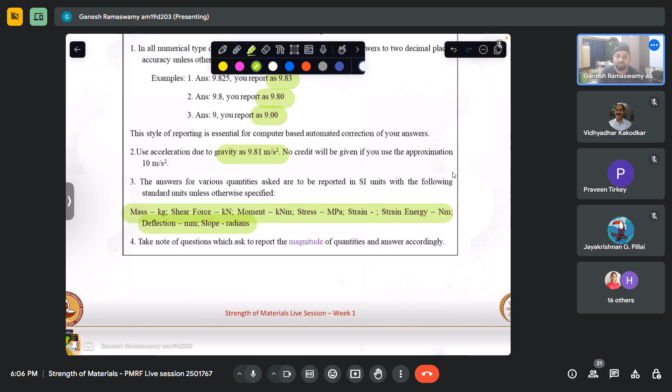For the various quantities that are asked, invariably it will be mentioned in the question what units you are expected to report in. However, I also urge you to be comfortable with unit conversions, because as a practicing engineer, when we come across different quantities, it will not always be in the units we want, and it cannot simply be multiplied. So we will require conversions, and it is important that we become conversant and comfortable with them.

Also, there would be questions where even though the answer is compressive or negative, perhaps it is a compressive stress, or a vector component which is negative, we have to look out for questions which ask for the magnitude. If the word magnitude is written, it is imperative that we report the absolute value in order to have that correctly. I hope we can abide by these simple rules so that we don't lose out on marks.

And I just want to... although, yes, please. Sorry, my name is Jayakrishnan. Yeah, hi, if I may ask, yes, so you mentioned about the two decimal places rounding.

So obviously when you have multiplication or similar operations, you can have the rounding errors add up. So would you advise that we deal with the whole set of decimals when we do multiplication etc., and just round off the final answer?

Actually, it will be preferable that you do that. But in any case, we have given enough leverage in the range to accommodate these deviations. Just in case it doesn't accumulate out of range, I'm mentioning it. There is no need for apprehension about whether we need to round off at each step or towards the end. We have given a comfortable range, and we are also in a position to make corrections if need be, although we don't anticipate that need would arise. For now, you can proceed with rounding off at steps so that we stay within the range.

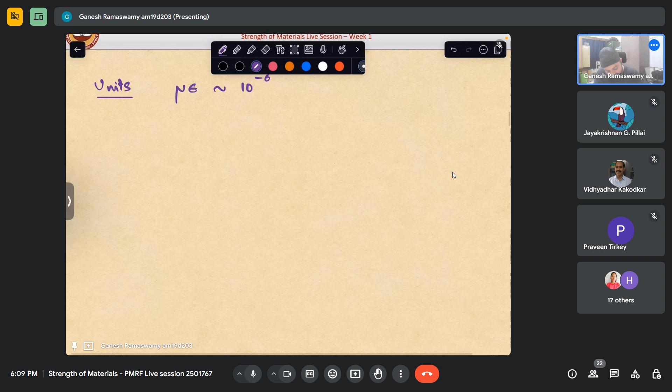The major issue comes when we deal with stresses and elastic constants. As we will see throughout this course, we'll have multiple elastic constants. Generally, let me take the Young's modulus as an example, and let me take it to be of steel. Steel's Young's modulus is around 200 GPa. The value is not important per se as of now, I'm just focusing on the units. So what does this GPa mean?

I've noticed that some people have a problem converting this towards the final answer. Even if they know the steps, there's a problem with unit conversion and they tend to lose out. I don't want that to happen, which is why I'm giving a basic brief about this. People might find it pedestrian and basic, but I request you bear with it so everybody is on the same page. So this is nothing but 10 power 9 Pascal. Now what is 1 Pascal? Pascal is nothing but 1 Newton per meter square — this is the unit. So when we substitute the value of Young's modulus in an equation, we have to ensure it is substituted in consistent units. Now, often we will come across a unit of stress.

The SI unit will be MPa. Now, what is MPa? It is nothing but 10 power 6 Pascal, which is 10 power 6 Newton per meter square, which is also equal to 1 Newton per mm squared.

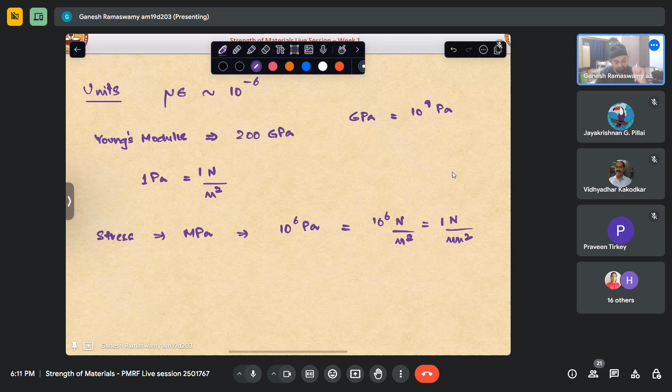So such conversions, I would urge anybody who is not comfortable with that to just practice around, so that whenever we substitute, because while solving questions, I will not be paying much attention to the exponents that I put in, but it is essential in order to account for the values correctly. So you can just take a note of this when we solve the questions. Okay, so with that out of the way, let us look at the first question.

We'll build in from a little bit of theory towards some practical problems. So there is an assertion that a rigid body does not undergo deformation. The reason, in a rigid body, the distance between two constituent particles does not change when the body is subjected to external forces. Now we saw there is a course that we have done on engineering mechanics, which is the first level course, where when we take a body and when we have, let us say that we have two components, 2 points on that body.

We subject it to some external force and moments. There are some external force and there are some couples applied, there are some supports and so on. So under the action of this, the distance between these 2 points does not change, which is why we don't worry about what is the internal response of this. We just see overall, does this body move, translate, rotate, and so on. That is what we saw in engineering mechanics.

So that simplifies our problem, although it might not be realistic. For the first level analysis, it is very essential that we do that. So when the distance between 2 points in a body doesn't change, we in abstraction, we hypothesize that it is a rigid body. So the rigid body does not undergo deformation, and the reason is the distance between two constituent particles does not change when it is subjected to external forces.

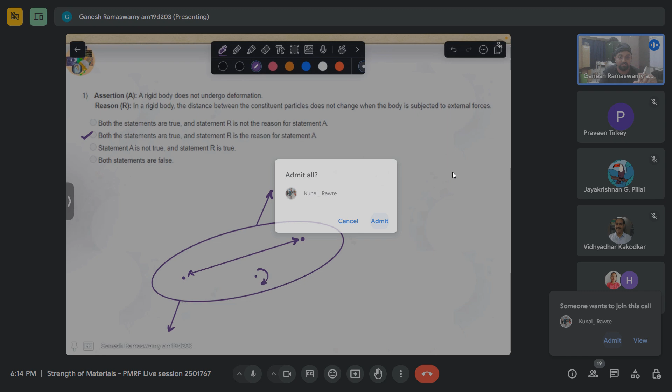But in this course, as we will see, that will not be enough for us to solve some problems. We necessarily have to design such components. So for that, we need to know what is the internal response, in which case we will relax this assumption of the distance being same. We will allow it to deform, albeit we will allow it to deform in a very small manner. The deformations will be very small. When the deformations are very small, we can apply all the forces to the initial system itself and go about our analysis. So that is the idea behind doing this.

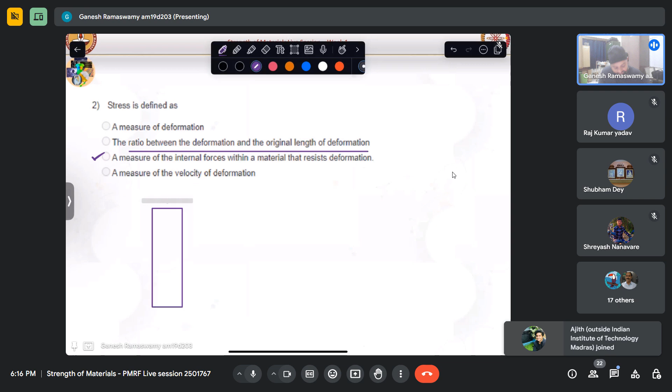So any guesses on which this is? I think option C. Yes. Yeah, exactly. So when there is a body, sir, option B. Okay, let us see why this is not the case. So basically we are having some member that is subjected to, let us say, a pull like this.

Let me take this to be some force that is applied. This member is subjected to some force, we are pulling it with some force. If I cut like this, I can actually see a cross-sectional area. It is a rectangular piece, let us say, and this has an area A.

So at any point far away from the loading, what will be my stress? Stress will be nothing but F by A. This is what we have basically studied. We will see that stress has deeper explanations than just this F by A, but for the sake of this example, I limit it to F by A.

Whereas under the action of this force, what will happen to this member? It will actually first elongate and it will also contract laterally. So this will be kind of the final shape, where again the force F is applied. The area would have shrunk and this will become like this - this is the area after deformation.

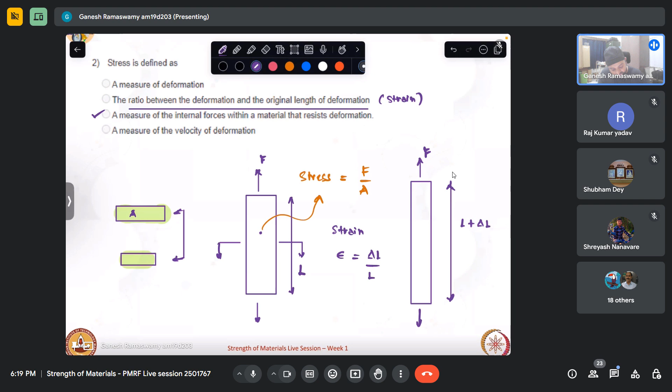Whereas when it is subjected to a force like this, what will happen? Let us say I take this here, I remove all this and I cut it artificially, just for the sake of analysis. I forget about the rest of the part - so this is a cut section. So when I pull something like this, it just stays, it is not that it keeps on moving, which means some kind of equilibrium is set up.

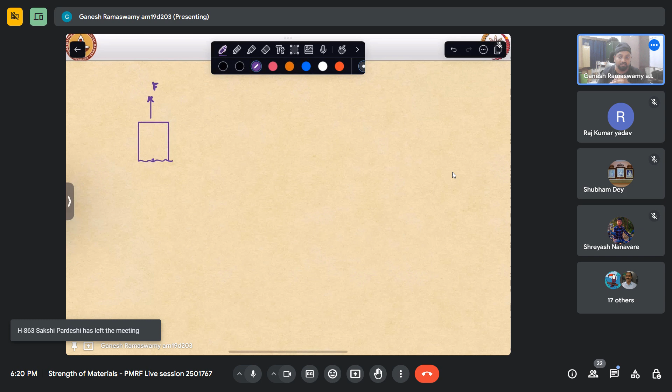That equilibrium is set up because there is an internal stress that balances out the force that was applied. This internal stress leads to equilibrium. So the material itself, when we are pulling, is developing resistance inside in order to equilibrate the external forces that were applied, which is what this statement also says - a measure of the internal forces within the material that resists deformation.

Why is it developing this stress? Because there is change in the distance between two points. The material doesn't want to allow it, so it is trying to resist it, which is the resistance that is getting built up. So is it clear, or I think I went through a circuitous way of explaining it, but I suppose I covered many peripheral aspects also.

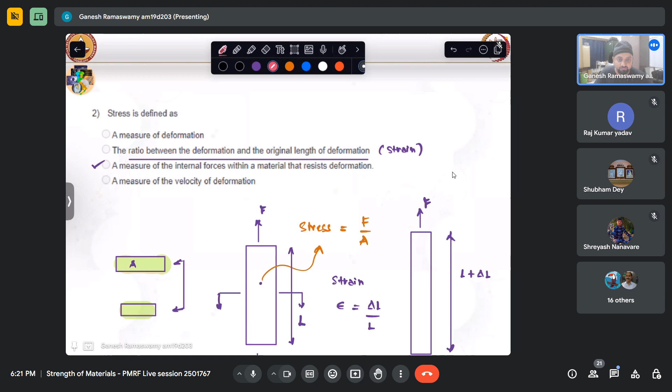If it is unclear, yeah, okay - if there are any questions, please feel free to ask while I move on. Okay, so let us look at this question.

There is an assertion that there is no engineering without idealizations. Engineering involves dealing with complex real-world systems, and idealizations are essential for engineers to analyze and solve problems efficiently. This is because even the simplest of problems involve a lot of assumptions.

Let us take a basic problem of a beam, since we have all come across beams in engineering mechanics. We saw a beam like this, with a hinged support and a roller. This is a simply supported beam, and then we applied a force, and went about calculating the reaction, shear force diagram, and bending moment diagram.

For this, let us say the force is applied exactly at the center. So what will the reaction be? This will come out to be P by 2, and there will be a reaction here which will also come out to be P by 2. Will there be any horizontal forces? There won't be.

So we will draw the shear force diagram and the bending moment diagram. And of course, this is incomplete without our sign convention, so the sign convention also I should mention. We go about doing our analysis like this.

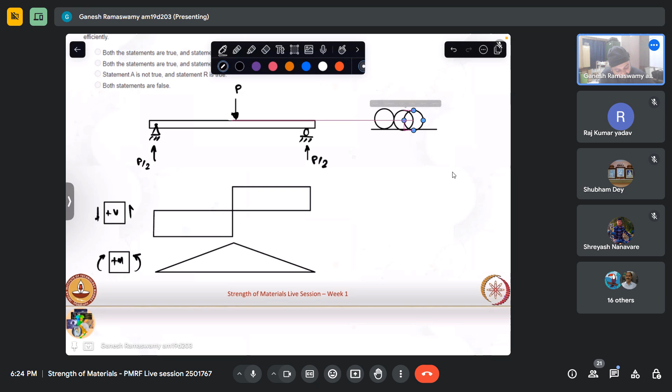But how many assumptions have we pushed under this is what we should be aware of. First of all, we have said there are no horizontal forces, and in principle there won't be. We said there is a roller here, but if we were to zoom in, there may be many rollers, and we have just taken for granted that there is no friction developed there. If there were friction, there would be some horizontal resistance, but we have pushed that under the rug, idealizing the roller support as frictionless.

We have also idealized this pin that is over here, the pin that goes into the beam, to be frictionless. So there is no friction, we have said.

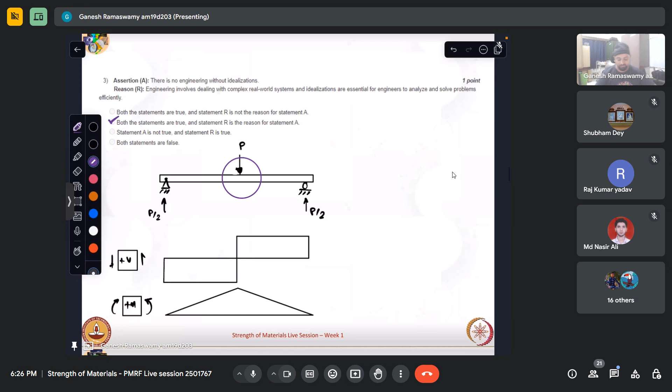Okay, so let us look at this question. It says if the material properties are same at every point of the body under consideration, the material is — which of the following is what is asked. I also encourage whoever is watching, if you know the answer, feel free to type it in the chat box. Yes, isotropic, isotropic.

Very well, so I'll give a brief about why this assumption is needed. Let us say I'm taking a simple example — we have a sheet of some material, and we have to design some component which is to be cut out of this sheet. Now if we have a sheet and we don't make an assumption that it is homogeneous, it would mean that if I cut the portion from here, or instead cut it from here, or maybe cut it from here, I would have to do three different analyses.

First, I have to cut the portion out of here, then I have to test that prototype and determine its material properties in this area, and then design, which is not a practical way to go about doing anything. Which is why we take it that given a material sheet, at each and every point, the elastic properties are the same.

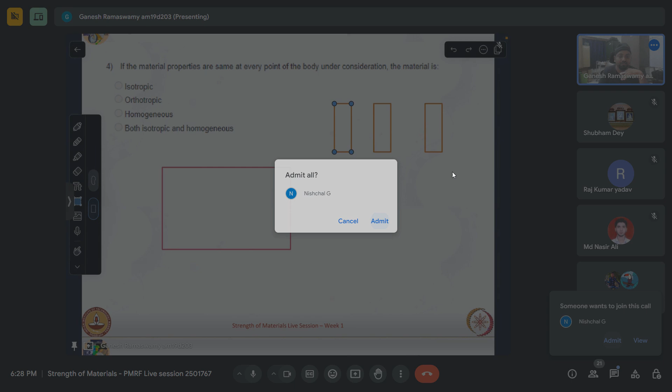So this is the only practical assumption with which I can actually go about designing my components. This is what is meant by homogeneous. Now let us see what is isotropic.

Let us say I fix the location. I have told the workman that now that I have taken the assumption of homogeneity, it doesn't matter where I cut it, whether here or here or here. Let us say the workman cuts it here. Now it is also possible that he can cut it like that, at some other angle, maybe.

So will the direction actually make a difference? It shouldn't make a difference because I don't have control over that. Now, when I actually have a material that is isotropic, what I mean to say is at a point, in every direction...

Let us say that at this point, the red piece was cut by one worker, the mustard piece was cut by another worker. So these two should have the same material properties. So what does this mean? That at one point, given any direction, if my material properties don't vary with that direction, then it is called isotropic. So homogeneity is from point to point inside that material, and at one point, in every given direction, if the elastic property is the same, it is called isotropic.

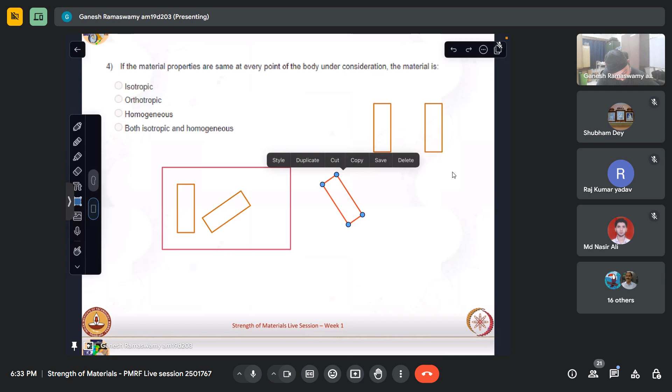If the material properties are the same at every point of the body under consideration, then the material is homogeneous.

Let us look at this question. Select the beam arrangements in which forces cannot be solved using the equations of statics alone. So what is being asked is which of these require more. Let us say we come across such a problem. What is the first thing we need to do? In order to design this beam, first I need to know what the reactions are.

If I have a beam, I need to design this. I need to know at each and every point what is the stress or strain that is getting developed, and there will be some criteria given to me which I have to satisfy. For example, strength cannot exceed a certain value, so the stress in the beam cannot exceed this much, then I will have one type of design. Stiffness criteria we will see - deformation should be this much, so to control that I have to design this beam.

There are different criteria which we will see later. But my first and foremost task is to analyze at each and every point what is the stress getting developed. For now, what do I know? In this beam, I know there is a force applied. I also need the reaction here. When I isolate it as a free body, this is a fixed support.

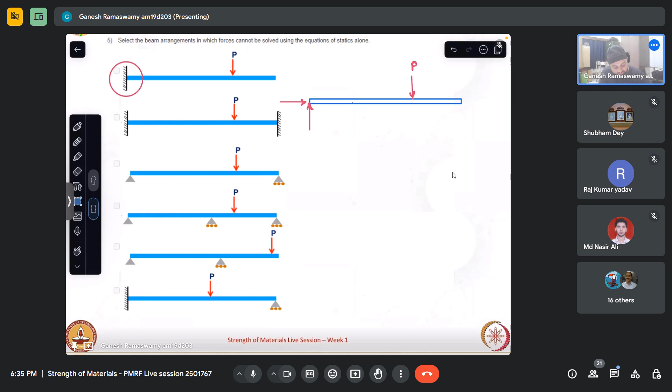A fixed support will just hold it, it will not allow it to move. So when we resolve it into components, it is resisting movement in the plane of the body along two mutually perpendicular directions, that is x and y. Someone might ask, if this moves this way, is that not being resisted? Then why are we not drawing the reaction like that? That reaction can actually be split into two components, x and y, which is why we take two basic directions.

All other directions can be resolved into components based on these two reactions. In addition to arresting these two translations, this fixed support also offers a rotational constraint. Let us say we had a pin support here - it would try to rotate, but the fixed end doesn't let it rotate, so there will be a moment also getting developed.

Only when I know all these quantities can I go about and find out the stress acting at each and every point. So the very first step is to obtain the reactions - we were doing it comfortably using equations of statics. What were the equations of statics? It was just the equilibrium equations.

So in the plane of this paper, for this beam, I say that acceleration along this x direction is 0, acceleration along this y direction is 0, and angular acceleration is 0 - there is no rotation. Based on these three conditions, we arrived at three equations: sigma Fx equal to 0, sigma Fy equal to 0, sigma M equal to 0. We were applying these three equilibrium equations consistently to find out the reactions.

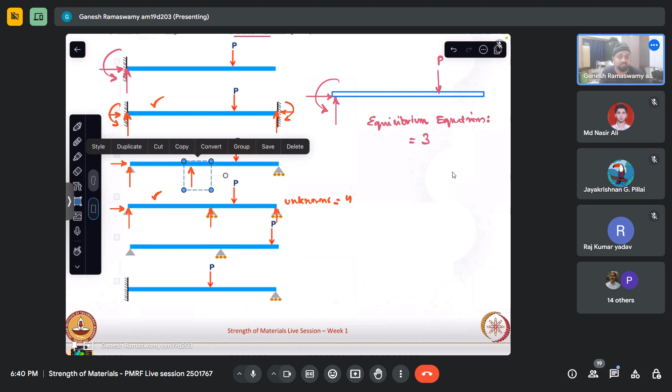What is the fifth one? It is just a variant of the third one. We had this case, and we have just taken this support and put it here. That is all we have done, so it has not changed anything. It can still be solved using statics, so this is definitely not our answer.

In the last case, we have a vertical reaction, a horizontal reaction, and a moment at one end. At the other end, we have a vertical reaction. So how many are the unknowns? Unknowns equal 4 and equations are 3. So this also forms part of our answer.

Now there might be a question one might ask: I know that this beam, let's say the first case, is subjected to only vertical force, so there is no horizontal reaction getting developed, the horizontal reaction has to be 0. Then how do you say it is an unknown? It is known that it is 0. Some might have that question. Why are we counting horizontal reaction as unknown when we can clearly see it is 0? What we have actually done is we have already used one of the equations, sigma f horizontal equal to 0, in order to conclude that reaction is 0. Implicitly, we have not explicitly done it, but in our mind, we know there is no horizontal force since it is not moving horizontally, so there is no acceleration, that is why the horizontal force is 0. Unknowingly, we might have done it, but we might still be thinking, why is it an unknown?

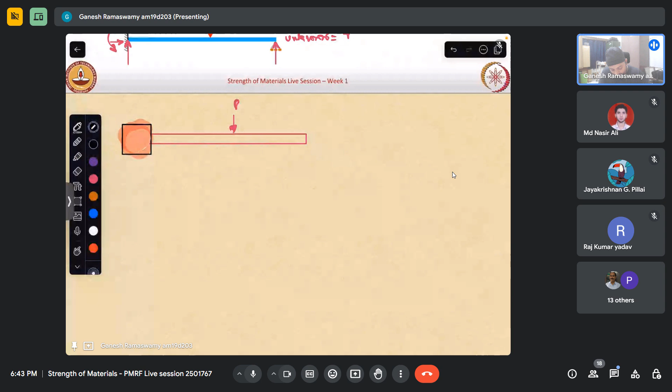So if the beam was like this, a cantilever, then it was very easy for me to solve using statics. Now what we have done, because this was deforming too much, we have put a support here. We have put a roller support here in order to limit that deformation. Now this has suddenly become statically indeterminate.

So in order for me to calculate this reaction, how much this reaction will be, I cannot solve it just using statics alone. So I have to bring in the deformation. How do I bring that in? Let us just see briefly how do we bring that in.

This will actually offer this kind of a reaction. So what we will do, we will first remove this support and let it deform. It will deform something like this, let us say. This will go to this point. Then we will take this beam again. I'll remove the load this time. I'll just put the support as an external reaction.

So what I have is the sum of the bottom two add up to the final result. For the first one, I know I can solve it by statics alone. For the second one, I need to bring in the deformation picture. Because of these two reactions, because of these two forces that are getting applied, it will add up to my original problem. So this is where we also bring in the deformation picture in order to solve the problem, in order to find out the unknowns. Is it clear? Are there any questions?

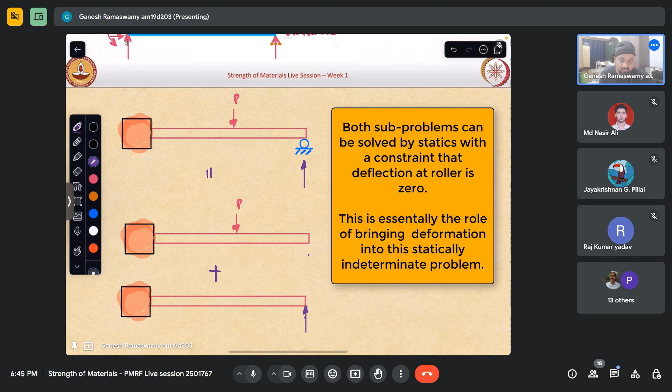Can you please repeat it?

Okay, so basically, let us say that we have a cantilever. We were able to solve this. Now, what we have done, we have propped it at one end. We have put one support. Now, suddenly, this is no longer compatible to be solved by equations of statics alone. We also need to bring in the deformation because we need one more additional equation, because there are four unknowns. So there are basically four unknowns now, but there are only three equations at our disposal. So the fourth equation will come out of the deformation, which we will study in this course.

This is the inspiration behind this question, why we need to identify whether the problem can be solved by statics alone. If we see it can be solved by statics alone, we don't even need to delve into this course. But there are beams, there are members that actually have more supports than are necessary for basic equilibrium. In order to solve such problems, we need to understand the deformation of the objects so that we can actually calculate the unknown reactions and subsequently design the components.

Is it clear? This is what I was saying. Yes, sir. Okay, okay.

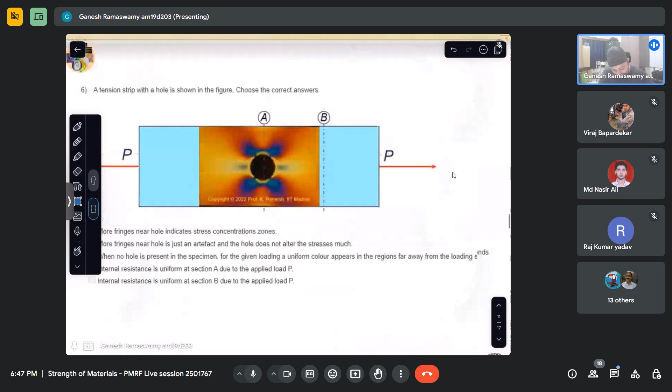All right. So let us look at this question. I'll just move the thing here. So if we don't understand these colors, let us not be worried. We have a dedicated week for that. But just the broad strokes I will give. This method is basically called photoelasticity.

So what this method does in this experimental method, we have some materials. When we pull it and place it in one arrangement called a polariscope, that is, it will have some components and it will have a light source. When we place the component there and pull it, it actually shows us how the stresses develop in that material, which is very interesting to see. We are physically able to see because when humans get stressed, they exhibit some symptoms. Similarly, we can even see how a material is getting stressed real time. When we actually pull the component, it will show some patterns which are representative of how the stresses are evolving in that material. So that is the experimental technique of photoelasticity.

Now what this question is saying is there is a long bar, long axial specimen, tension strip, which we are trying to pull at both the ends. In general, if we have a strip like this, and then we try to pull it,

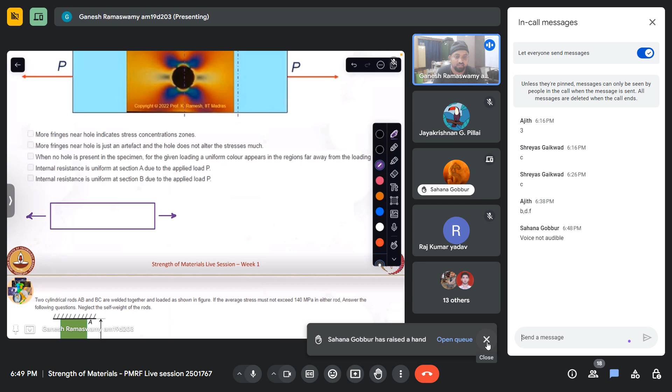What do we anticipate when we have a material strip and we try to pull it away from the loading points? We see that the stresses are more or less uniform. But by introducing just a small hole, the picture totally changes. When we load this, it should have been a uniform color, but with the hole, we see more colors and patterns forming. We will see how to interpret these patterns later. Basically, we are physically seeing the effect of a hole on a tension strip.

One might argue we have a tension strip with just a small hole, what difference can that make? But we see it makes a marked difference in the stress field. If we simply ignore the hole, take stresses as uniform, and design our components, but due to manufacturing a hole is left in the component, our design is no longer valid. So it is very important to understand the effects of inclusions and defects like this.

This delves more into a field called fracture mechanics. Presently we only take our tension strip to be free of defects, but it's important to understand the limitations of what we are studying. We should not think that once we've done this course we know all the design in the world, because certain assumptions have gone in here which might get violated in some cases requiring special attention. That is the inspiration behind this question.

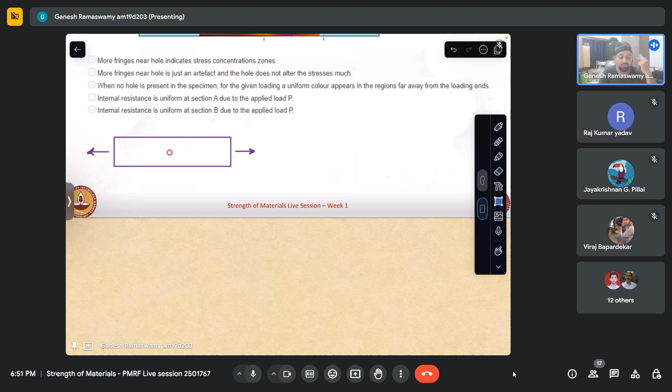Is my speed of delivery okay, or am I going too fast or slow? Could I get some feedback on that? If I'm going too fast I can slow down. It's okay, sir, it's fine, all right. Thank you, thank you.

Let us say I take this specimen, make a cut here, throw away the rest, and just retain what I want to see. As we saw, this component, I have cut it here. This is not moving. I have pulled it and it stops somewhere, so it is in equilibrium, which means there will be stresses developed like this.

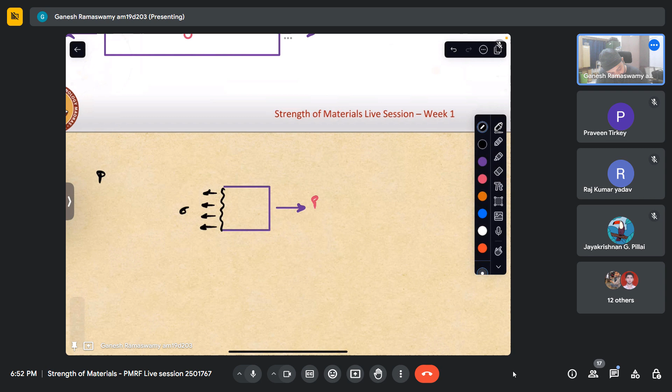This is my force P that was applied, and this will be some sigma. Let this tension specimen have an area A, so sigma equals P by A. I can see that my stress is uniform throughout the depth, uniform width.

Whereas if I take the same thing, this time instead of cutting it here, I'll cut it at the hole. Now what will remain? This will be the cut section, and I'll have the hole like that. So the stresses will no longer be uniform here. What happens is stresses will build up, since here there is no material.

I'm just qualitatively trying to explain what is happening. So the stresses are no longer uniform; they are a function of the depth. The stresses show a variation like that, it is no longer straight.

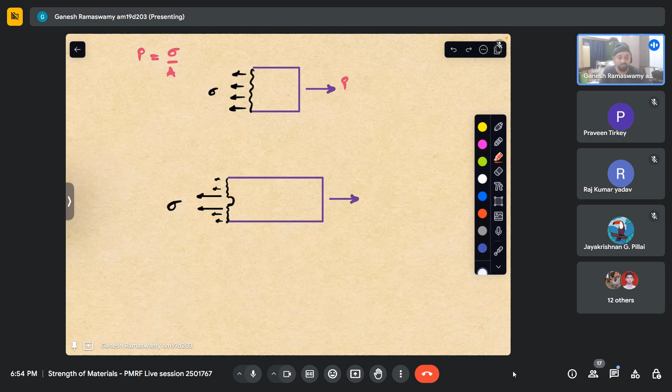If we were to design our components based on this stress, we can see that at the hole it gets exceeded by some factor, which is called the stress concentration factor, covered later. What I'm trying to say is, if there is a small hole, the stresses shoot up near the hole, and that is actually showing in these patterns accumulating towards the hole. So more fringes near the hole indicates stress concentration.

More fringes near the hole is just an artifact, but the hole does not alter the stresses much. We discussed that photoelasticity shows the stresses in real time when we apply the forces, so it is not an artifact. It is coming from the mechanics of the problem, and it indicates that the stress is getting concentrated there.

When no hole is present in the specimen, for a given load a uniform color appears in the region away from the loading point. We can see this here. We have the hole here. If we were to look at this section...

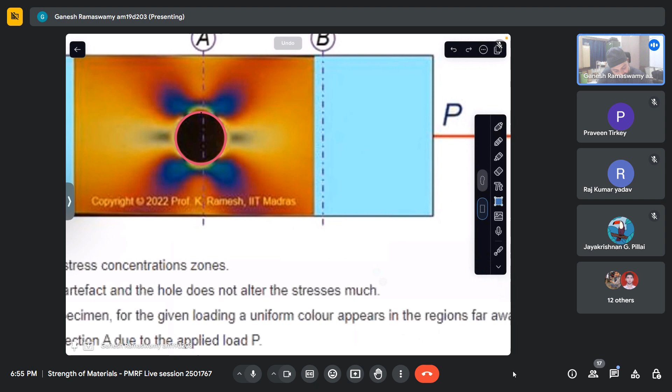I will take this section out separately so that we can appreciate it better. I'll just paste it here. Let me crop it like that. One minute, sorry.

Here I can see that the color is more or less constant, is it not? If I compare it to this place, if I take a section here for example, at the hole I'm able to see so many color changes, but away from the hole the color is more or less uniform.

I'm taking just that strip because when we see the entire picture it generally clouds our judgment. That's why I'm taking a small strip. So we are able to see that as we move away from the hole, the color is more or less getting uniform.

Again, when we go very near the point of force application, there also we will see some stress concentration. So when no hole is present in the specimen, it will have a more or less uniform color at regions far away from the loading ends. This is quite true — we are also qualitatively able to see it.

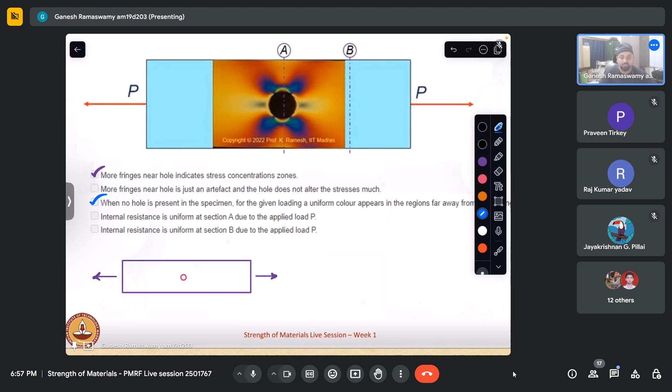Internal resistance is uniform at section A due to the applied load P. We just saw that when we cut a section like this, it has to balance out the force P. The stresses get developed like this — it is not uniform, it has a variation. It shoots up near the hole and then becomes more or less constant near the ends. So this is not true.

Internal stress is not so at section A, whereas at section B it is more or less uniform of a single color, so this is true. Is it clear? Any questions?

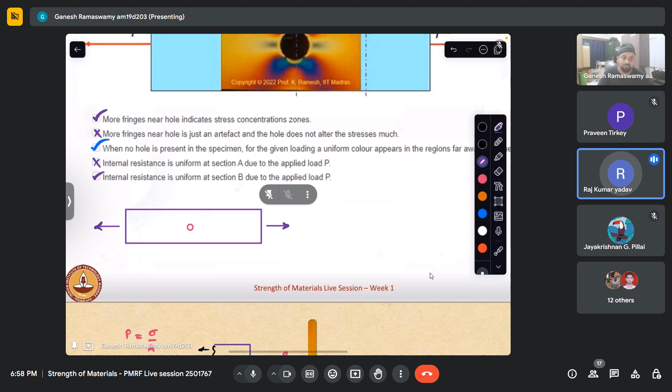Yes sir, I have a question. Go ahead. What does the region represent in the photoelastic pattern during applied tension? What does it represent?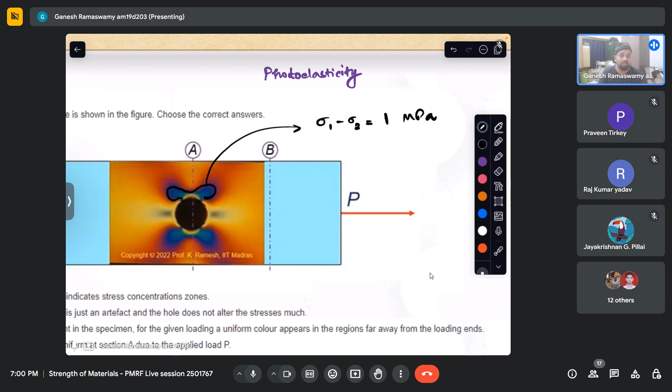I hope I've answered. Yeah sir, please go ahead.

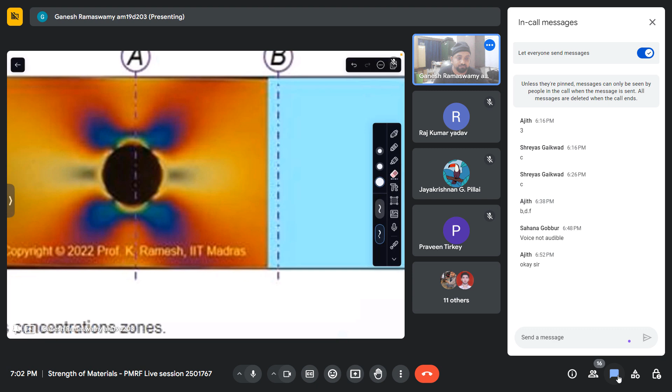Somebody had Dr. Anbumalar - oh, has he left the meeting? Yes, please go ahead, excuse me if I may ask.

So what does sigma 1 minus sigma 2 represent? I understand sigma 1, but as a physical quantity, what does it represent? It represents the difference of principal stresses.

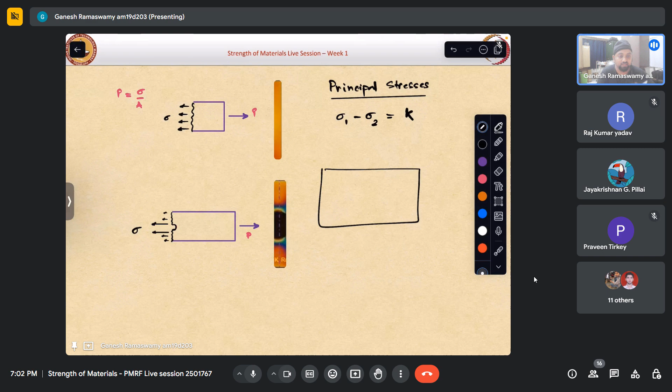Let us say that is equal to some constant. Are you aware of the concept of principal stresses? Yes, okay. For others who are not aware of this, there is no need to worry, we will be covering it in great detail as the course goes about.

But just to answer Mr. Jayakrishnan's question, basically if we were to have just this force applied, at any point sufficiently away from the loading point, we know that our sigma 1 is just P by A. Sigma 2 is 0 in the plane of the problem, we have only two principal stresses, out of which one is P by A, one is 0. So sigma 1 minus sigma 2 comes out to be just P by A, which happens to be a constant.

And that constant is getting represented in the color. It is just a constant color. So every color, every RGB of that color is characteristic of one number, which represents sigma 1 minus sigma 2. Depending on how this difference varies, our color also will vary.

Maybe this will get covered - it will, it will. I'm still not clear on what it physically means, but maybe we can discuss it. I welcome you to please ask the question so that I can try to convincingly answer you. No, I was just trying to understand.

So I understand sigma 1 is the max principal, sigma 2 is the min principal. And here for a uniaxial stress state, you know, it is equal to P by A. But I also know that it's the diameter of the Mohr circle, etc. But just from a general perspective, I mean physically, for example, sigma 1 is the plane along which you have the maximum stress, etc.

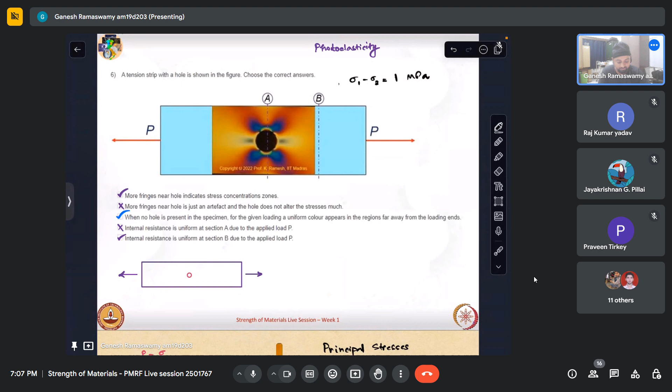So that is a brief about photoelasticity, important because our professor K. Ramesh is an expert in this field. Throughout the course, many examples are covered using experiments, showing experimental results to convincingly demonstrate physical reality. Most of those results are from photoelasticity, which is why it's important. There's no need for apprehension that you don't understand it presently, because we have a dedicated lecture on photoelasticity. This was just to enthuse learners that we can see colors as we apply forces. We will go about seeing this quantitatively as we proceed in the course. Please bear with it, and ask as many questions as you have.

Sorry, yes, can I ask one more question? Yeah, go ahead. No problem.

The fringe pattern shown here, I assume, is for a ductile material, right? This is basically epoxy. It's a linear elastic material, well below yield, we are dealing only in the elastic range presently. I was wondering if a brittle material would show something similar. This is brittle actually. And in fact, even ductile materials, in the linear range, as far as the scope of the course goes, in the linear elastic range, it won't be any different. And when we deal with plane stress later, what we'll find surprising is if we take an aluminum disc and an epoxy disc and press them, we might conjecture stresses would be more in aluminum and less in epoxy, whereas stresses always remain the same, independent of the material. When dealing with a sheet for plane stress, stresses remain the same, but strains don't. We will see that in detail.

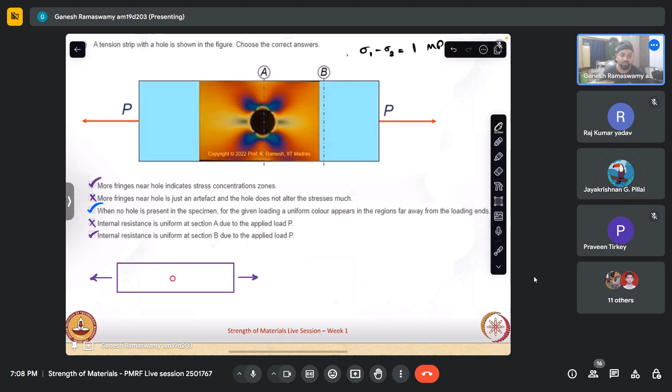Right, yeah, all right, sure. Okay, sure, thank you.

So let us look at this question. Two cylindrical rods AB and BC are welded together. Let me draw the outline of those two rods. We have two rods like this, and then we have 40 kilonewton and 30 kilonewton applied. The weld is over here. These two cylindrical rods are welded together and loaded as shown in the figure. If the average stress must not exceed 140 MPa in either rod, then answer the following question. So we need to design such an assembly so that the average stress does not exceed 140 MPa anywhere.

Presently, our understanding of stress is P by A. Whatever is my screen, it is not getting updated, or I don't know what is the issue. One minute. Yeah, okay, it is getting updated.

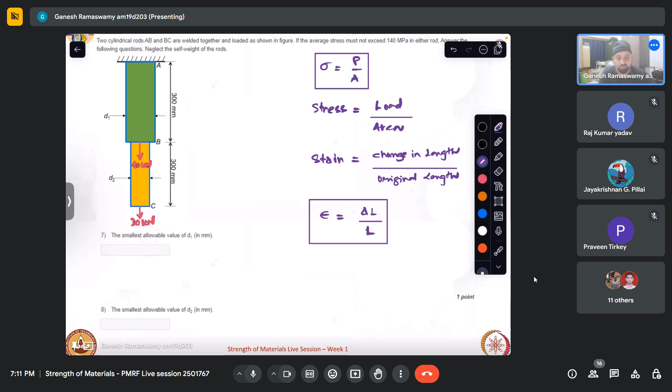Okay, let me take it up in a new slide. Presently, we know that stress is load by area, which is represented like this. We know strain is change in length by original length, which is represented like this. And then we have studied in our high school, basically Hooke's law.

Which says that stress is proportional to strain, is what it says. And that proportionality constant is nothing but our Young's modulus. This is very basic information that we have presently. Granted, it is not sufficient to solve all the problems, but this is as far as we know presently.

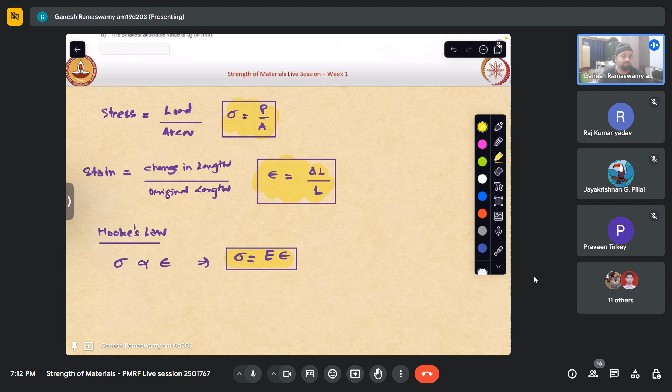We will see how it will get modified and how many components will start coming into this. But for the sake of this simple problem, let us just keep in mind these aspects. Now, if I were to substitute into this problem: sigma is P by A. So P by A is equal to E into epsilon, which is delta L by L. So from here, delta L comes out to be PL by A E.

This is another useful relation that we have. What does this relation tell us? That if there is a member subjected to axial pull with a force P, and if it has a length L, a cross-sectional area A, and if it is made of a material that has Young's modulus E, then the change in length will be this much. That is all it says.

I hope this is clear to everybody. Basic relations. If there are any questions, please ask. Yeah, yes sir, it's clear.

Okay, thank you. So what I have done: how we have defined stress is just load by area. How we have defined strain, change in length by original length. How we have related these two by something called Hooke's law. The very basic version of Hooke's law we have studied in school: sigma is E into epsilon. Or we would have studied that load is directly proportional to displacement in a spring, for example. It is the analog of that in mechanics.

And I have just substituted and got these three expressions. So we just need to keep these three expressions in mind presently, and let us operate with that and see how many problems we can solve. As and when we encounter a bigger issue, we will try to define more things and go about solving it.

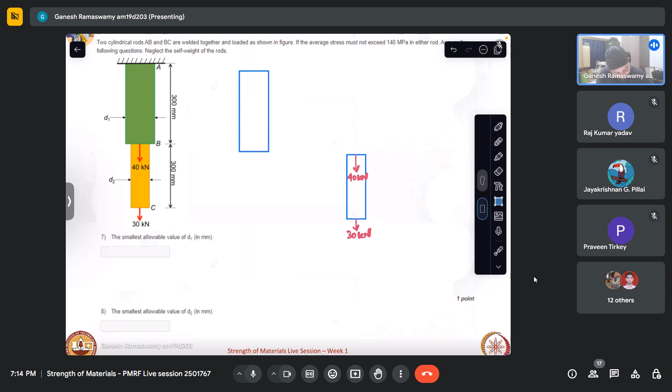So let me take this assembly apart. I have taken it apart. What I will do is separate it out like that, and let us take that this force is applied here. So I have not done anything, I have just separated out the components. Basically, I am trying to draw the free body diagram of that. And this is a better way to proceed when we go about it.

So let us take the bar AB. This is AB. Now we have applied it with 40 kilonewton. On the top, it is actually fixed. So when we separate it out, as we did in beams, we have to compensate that by a reaction force. So let me draw that reaction force, reaction at A.

So far so good. Actually speaking, in the free body diagram, my weight should also come, Mg should be acting. But the question says I can neglect the self weight of the rods, which is very less as compared to the loads applied. Hence, I can safely remove this from my free body diagram. But nonetheless, we should remember that only when the statement is given, we should exclude it. Is the free body diagram of AB complete?

Sir, does moment also act at the fixed end? That's a good question. Presently, in this context, we are dealing with axial rods. It says rods, so predominantly there is only pull.

If I were to apply a force like this, then I will also have bending that comes about. But since we are only looking at axial pull for this problem, I have not brought in the bending moment; otherwise it will come. Rods are predominantly axial members. Beams will take bending, so we will discuss all these separately. Towards the end, we will collate them and do a comprehensive problem at a later stage. Is it clear, Mr. Ajit?

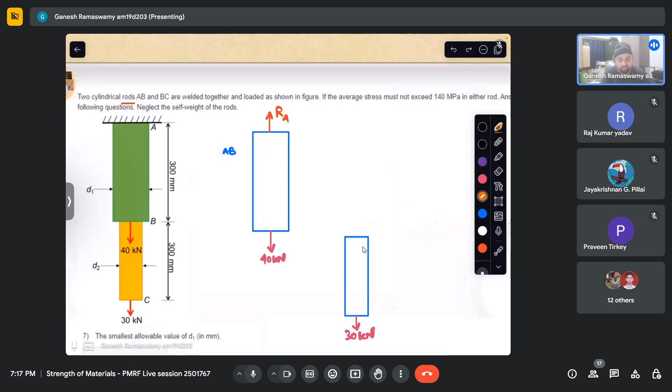Okay, so is the free body diagram complete presently? We have compensated for the weight because it says it doesn't have any self weight, so we have avoided that. The 40 kilonewton that was applied, I have applied that. The reaction at A, I have removed the support and replaced it by a reaction. But there is also one more component that is welded together with this, and I have not accounted for the interaction of that component.

Let us say that it provides a pull. It provides another pull. Let me put it in some other color. This is F on A due to... let me call it 1 and 2. Let me call this 1, let me call this 2. This is basically F on 1 due to 2.

There will be a connection, so it will apply some force. So now the free body diagram is complete. Now when I go to the other free body diagram, again this will have some mg, but since the mass is given to be ignored, I will not put that. Is there anything else that is getting applied?

The Newton's third law pair of this force has to be applied in that also. So what I'll do, I'll just make a copy of this. Now there might be a question whether to apply it like this or like this, so this is where we have to be careful. Once we have decided on one body that the force is like this, its Newton's third law pair has to be applied in the opposite direction in the other body. This is something to be kept in mind throughout the course. So because we have decided F12 is pointing downward, this will be F21.

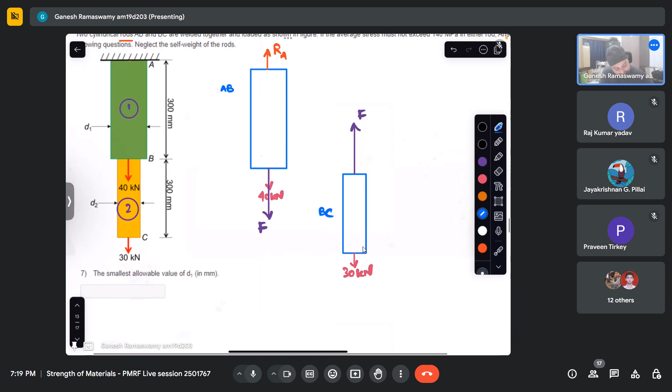So now that our free body diagrams are complete, let us go about solving it. Let me take this BC first. I know that under the action of these forces, it is in equilibrium, so I will apply sigma Fy equal to 0 because it has no acceleration. So what does this give me? F pointing upwards minus 30 kilonewton is equal to 0, or F is nothing but 30 kilonewton. So this is one result I have got, I have solved for F.

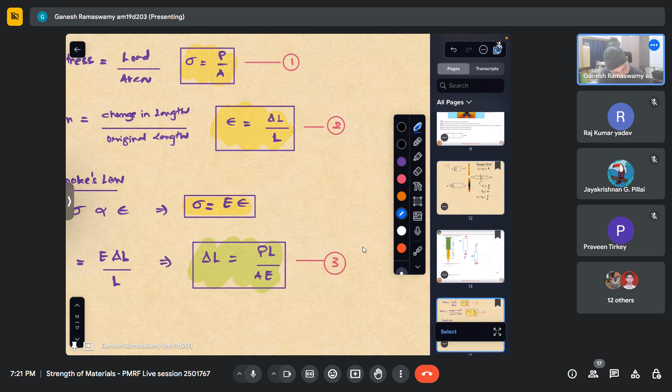Now I'll go to the next free body. Let me again apply sigma Fy equal to 0. I have Ra minus 40 kilonewton minus F is equal to 0. But F I have already got as 30 kilonewton. So Ra is nothing but 40 plus F, or Ra is nothing but 70 kilonewton.

It might appear as overkill for some people that why are we going into so much detail when we can simply see that the force applied is this much. It is because if we do these things systematically, when we want to solve the assignment problems, it will be much easier if we make this a habit of drawing the free body and going about it. Okay, so now we have got the force. So therefore, force in member AB is nothing but 70 kilonewton, and force in member BC is 30 kilonewton.

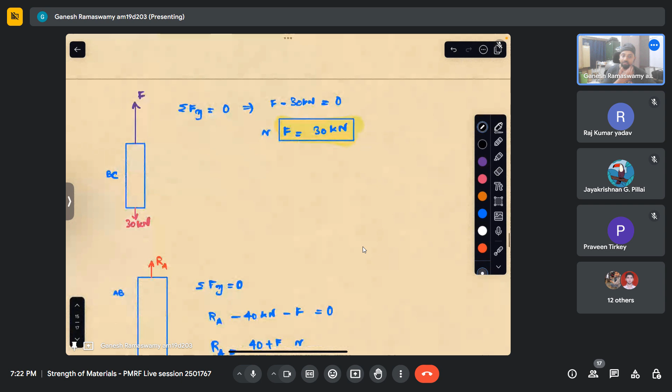This we have calculated. Now, what does the question say? That if the average stress must not exceed this, answer the following question: what is the smallest allowable value of D1? What is the smallest allowable value of D2? What are D1 and D2? It is nothing but the diameter of these rods.

So diameter of AB rod is D1, diameter of BC rod is D2, and the stress is given. So from this, we can see that stress in AB is nothing but force in AB by area of AB. We are given that the stress in AB must be less than 140. Force in AB by area of AB is equal to stress in AB, which is what we are given. Now force in AB is 70 kilonewton by area of AB should be less than or equal to 140 MPa. The allowable average stress should not exceed 140 MPa is what we have.

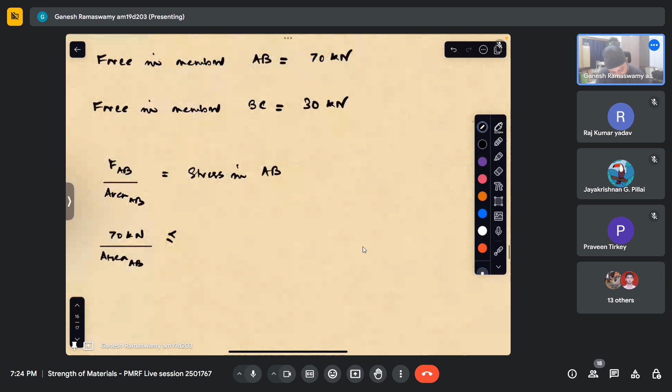So this means 70 into 10 power 3 to make it Newton by area is pi D1 squared by 4. Area of a circle, so cross section of a cylinder is a circle. Area of a circle is pi D squared by 4, or pi r square, however we want to say it. Should be less than 140 MPa. Now I can simply solve for D1 from here. What does that come out to be? 70 E3 into 4 by pi by 140, square root, is coming out to be 25.23 mm.

Exactly. So I encourage, as Mr. Ajit has done, I encourage others also to work out these problems alongside as I do it, so that you are comfortable and enthused enough, so that you don't just see me writing down something. If you participate, it will be much more interactive and beneficial. And since I'm solving it live, there is a possibility that I might make some calculation errors, so it can easily be caught on time.

So D1 comes out to be... one thing I have pushed under the rug here. When I take D1 to that side, actually I will get the sign like this: greater than equal to 25. So the minimum allowable is 25.23. 25 is not allowable, 25.5 is allowable. So this is why that constraint minimum was given. So this is coming out to be 25.23 mm.

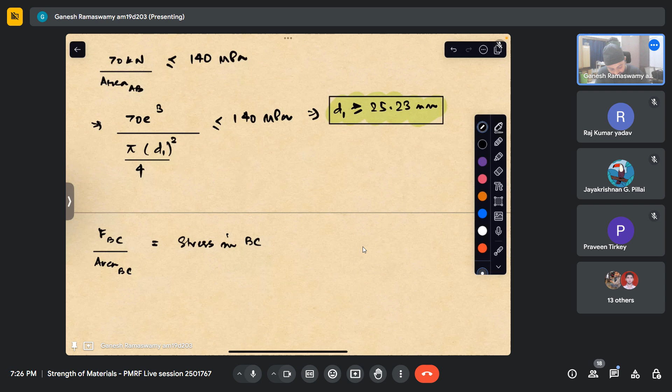Similarly, for D2, we can solve in a similar fashion. This time we can do it a little fast. So for D2, I'll just make a copy of this. Stress in BC: force in BC is 30 kilonewton, so I'll take it to be 30 E3, meaning 30 into 10 power 3.

Because it often happens that sometimes very small doubts might be there which people might not ask, but it might not be clear, so I just try to put everything out deliberately so that it is clear for everyone attending. So 30 E3 by pi, it was D1 or D2? It was D2, so it will be pi D2 squared by 4, should be less than equal to 140 MPa, I think it was, yeah, 140 MPa.

So from here, it is just 30 E3 into 4 by 140 pi, root over, should be less than equal to D2 if I take it to the other side. So I just solve this. What do I get? 30 E3 into 4 by 140 pi, root over this. It comes out to be 16.52. So I encourage you to solve it parallelly and check if my answer is okay. So this has come out to be 16.52.

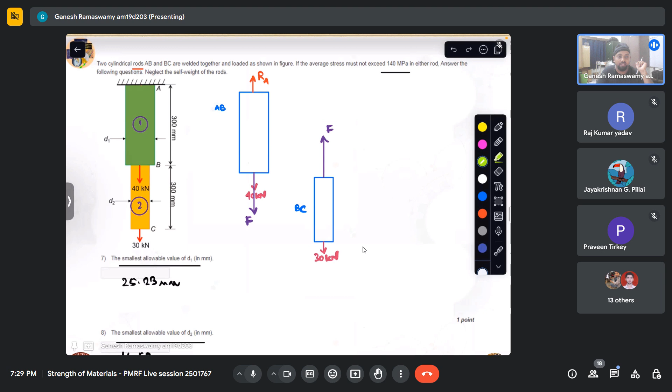In the question, we were given only one condition, that the maximum stress should not exceed this much. There could also be an additional condition someone might pose, that the total elongation should not be greater than some value. So the length will also come into picture. In design, we will have multiple criteria. Presently we have designed it only for the stress criteria.

A question might also ask from the deformation criteria, the total deformation. Let us say there is some component bed over here, it should not touch that. There is a distance between that. So this is the maximum allowable deflection it can take. It should not go beyond this limit. If we are told that, then that also will come into the picture.

I hope I have done some justice in explaining this question. If there are any follow-up questions, please feel free to ask. Could I get some feedback if I'm going in excruciating detail? Do I need to limit going into that much detail, or is it okay?

It's fine? Okay, fine, all is right. Fine, sir.

So presently we have dealt with a question that has two components, two cylinders that were welded together. Now let us do the same thing, but we will graduate to an actual structure, a truss. This truss, we have a number of times solved for the forces in our course on engineering mechanics. So let us look at this.

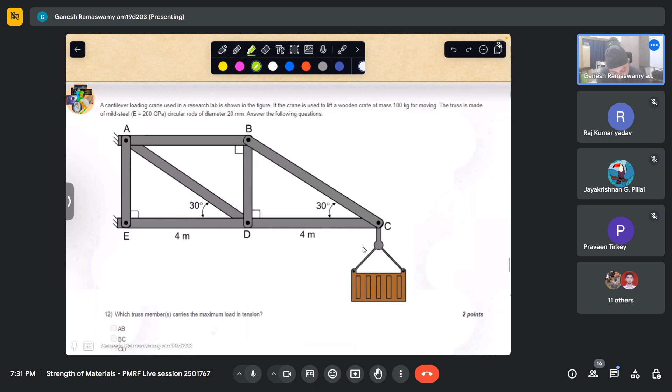A cantilever loading crane used in a research lab is shown in the figure. If the crane is used to lift a wooden crate of mass 100 kgs, so the mass is 100 kgs, that is given. The truss is made of mild steel. Mild steel has E, E means Young's modulus, is 200 GPa.

We have already seen in bits and pieces how to convert GPa, what is Young's modulus, what are these components. These things we have seen, so I need not delve much into that. These are circular rods of diameter 20 mm. So the dia, which is also represented by phi often, is 20 mm. Therefore, area would be just 20 squared pi by 4 mm squared. So this much we know.

And then we have the geometry that is given, and we have some questions that we need to solve. So let us go about seeing this.

Before we begin, let us see how this is made. The hinge is not shown actually. If we see at this joint, the hinge would be something like this. So that is not presently shown. Why I am emphasizing on that is one should not think that this member is actually fixed like this. If that member is fixed like that, it becomes a beam. It is no longer a truss.

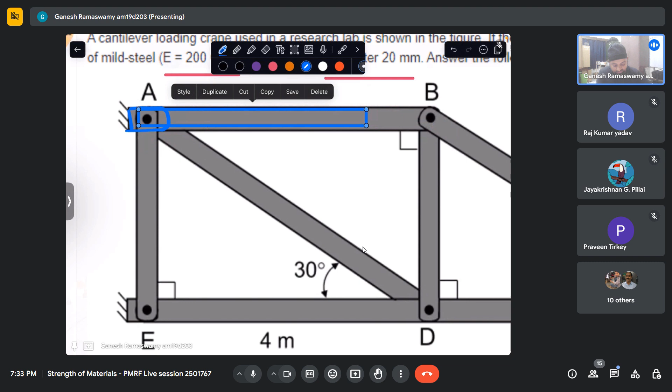It will also have some bending, but in the question, it is qualified as a truss only. So actually, the hinge will be like this, and then the member is just rectangular. The member would have been brought like this and the pin is inserted. So that is clear to understand. I hope you can appreciate that.

Now we have two hinges that are placed at A and E. There is no roller, mind you. Both are hinges, both are pinned ends, and there is no roller over here. It's a different kind of support we must keep in mind.

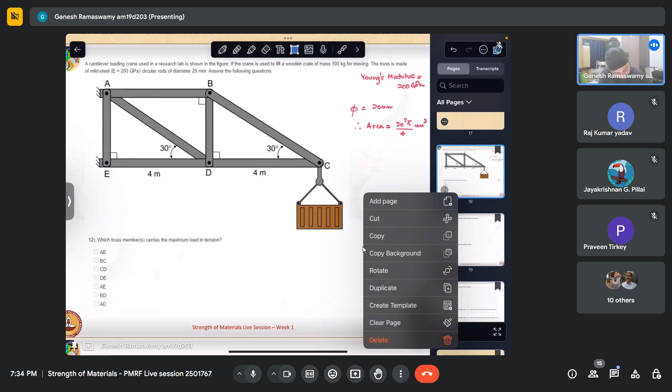So now let us replace this. In fact, let me just copy this. One minute. Yeah, I'll just add some pages here. So this is my structure.

What we'll do is we will remove the weight and replace it by the mass, the mass that was 100 kg. So I'll just put 100 g. I can replace that later always, or let me just do it right away. What is that? So this is 981.

This is my question, that 981 is applied. My first question is asking which truss member carries the maximum tension, maximum load in tension.

But it is also time that we graduate from our engineering mechanics training, and we should be able to quickly gauge for most of the members what kind of forces get applied, that is induced. So if we just look at this portion, if I were to take this as a structure as a whole.

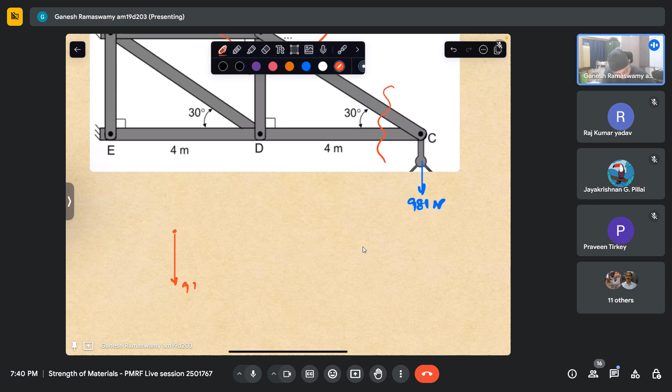The same thing one can easily do using method of joints. So one can easily take this joint, take a section like this. First we will take a section like this. At C, we know downward load is 981 Newton, and then we have a force that is getting applied like this. This is force in member BC. Let us take the force in member CD like this.

Then we apply sigma Fx equal to 0, which gives us FBC cos 30 is equal to minus FCD. This is one equation. Sigma Fy equal to 0 gives us FBC sin 30 equal to 981 Newton. So FBC is actually 981 by sin 30, which comes out to be, yeah, I'll have someone answer that. That is good, it is 1962 Newton.

So FBC is coming out to be positive, which does not indicate whether it is tension or compression. It only indicates that the direction we have taken is correct. So FBC is nothing but FBC we have solved. FCD will be minus FBC, 1962 cos 30. FCD is minus 1962 cos 30, it is 1700, that's good. So these two we have.

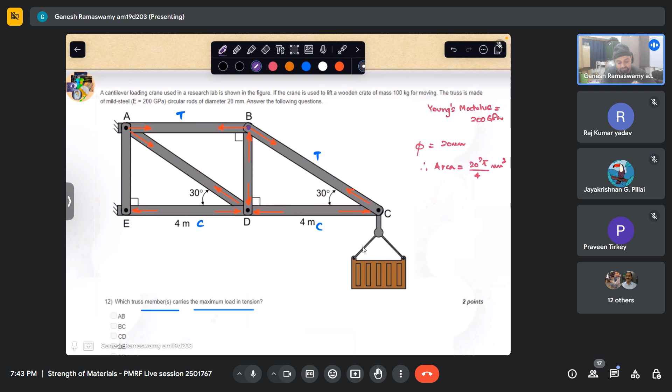Okay, so we have found out these two member forces. Like that, we can subsequently go about finding other member forces also, which we will do. But for the time being, let us put our attention on member AE.

Can anybody guess what kind of force gets induced in AE, whether it is tension, compression, or something else? Compression, okay.

One thing to note here is... any other answers? Would it develop any force at all? Exactly, that's the thing - what is happening to this member?

It is connected to two pins, which are connected to hinges like this. There is no roller, there is no movement. So essentially we have 2 points, and both the points just remain there. They are not moving. Even if one point moves, that is when the force will get induced in that member. Whereas that is not happening, so this is a zero force member.

So the force is 0. Force in AE is 0. I'll just put it like that, let me use some other color. This is a zero force member, because of the way how it has been fixed, because of the support conditions.

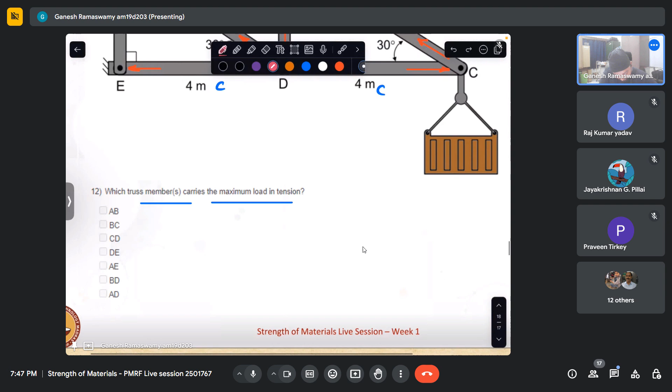So which truss member carries the maximum load in tension? We have seen BC. Force in BC has come out to be 1962.

Which all are tension - now again, AB is also a tension member. So from here at this joint, if I just isolate that, I can easily find out what force in AB is. What will force in AB be? Force in AB is nothing but 1962 cos or sine 60.

Since sine 60 is less than 1, naturally our force in AB will be less than force in BC. So definitely out of the tension members, this is also a tension member, by the way. This is a compression member. So out of the 3 tension members, one is 1962, and one we have derived it to be less. So AB or BC is definitely one of the answers.

AB is not the answer. CD is a compression member. DE is also a compression member. AE we saw is 0. BD, between B and D, is also a compression member. AD we have to see. How much is the force in AD? We will have to see.

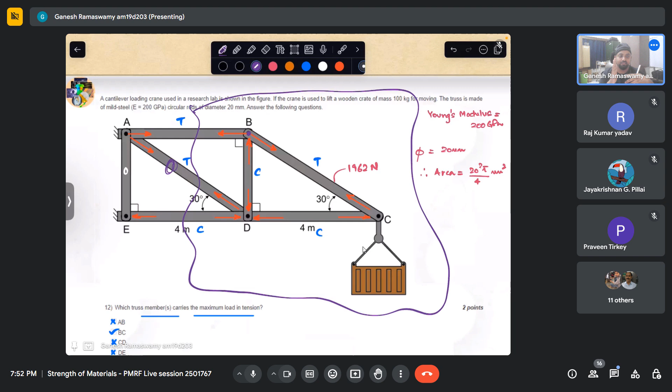So FAD sin 30 will be nothing but my W, that is 100g or 981, or FAD is nothing but 2 into 981, which is 1962. So FAD also comes out to be 1962, which is same as FBC. That is why both are correct. I hope it is clear to you what we are doing.

So this has come out to be 1962, and this is actually tension. So this is correct. In which case FED, we can calculate it from here. FED minus 1962 cos 30 minus 1700 equal to 0. FED is nothing but 1962 cos 30 plus 1700, which comes out to be 3400, as someone has correctly solved it.

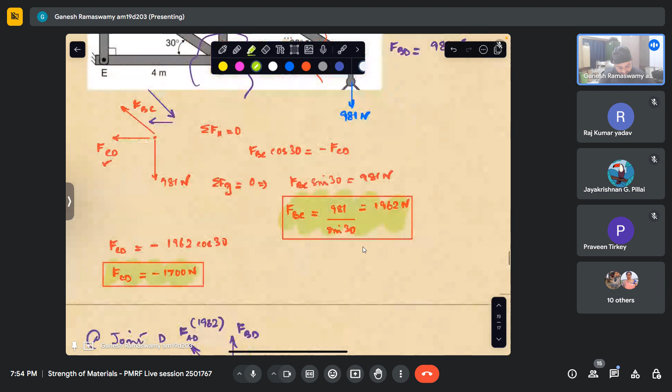Since I'm also solving it in real time, there is a possibility there might be some calculation errors. My focus is not so much on the values, so to speak, although that is the final goal. My approach is more towards the approach to the problem. I hope you can appreciate that. So FED is 3400, which is in compression. So we know from here that the maximum compression is being taken by member ED or DE, whatever that is.

Now that we have got all the stresses and nature of stress in all the members, it is just a matter of invoking our understanding of stresses and strains. We know stress is nothing but P by A. P we have got, A is given, the member dimension is given, so we can simply calculate A. We just need to calculate the stress in each member.

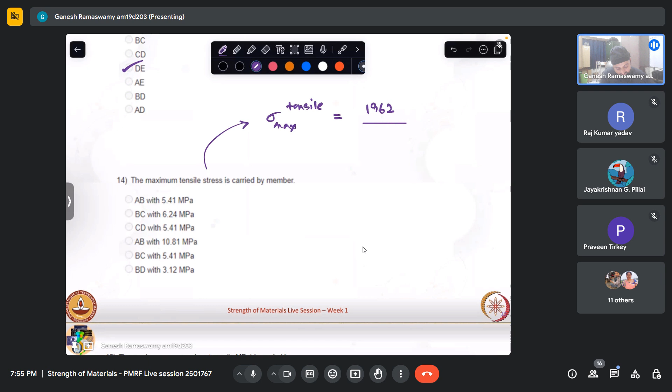If we have calculated the maximum tension to be 1962, the maximum tensile stress is nothing but 1962 by area. What was the area? Diameter was 20, so area is 20 squared pi by 4. So what does this come out to be? 6.24. Is there an answer like that? 6.24 BC. Yes, very well.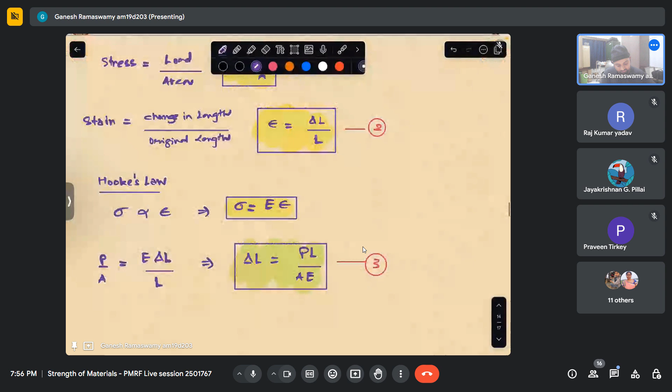So far we have dealt with only stress. Now we are being also asked what is the magnitude of maximum deformation in the truss member carrying the maximum tensile load. How can we do this? We have a recipe for this, which we discussed earlier. The deformation is nothing but PL by AE.

Do we know the length of the member? We know. Do we know the force that the member is carrying? Yes. We know the area. We have been given E. So let us just calculate it for one member. For the other member, I leave it to the audience to do it.

So for the member carrying the maximum tensile load, P is 1962 Newton. Area is 20 squared pi by 4. E is, what is E? 200 GPa. So E is 200 GPa.

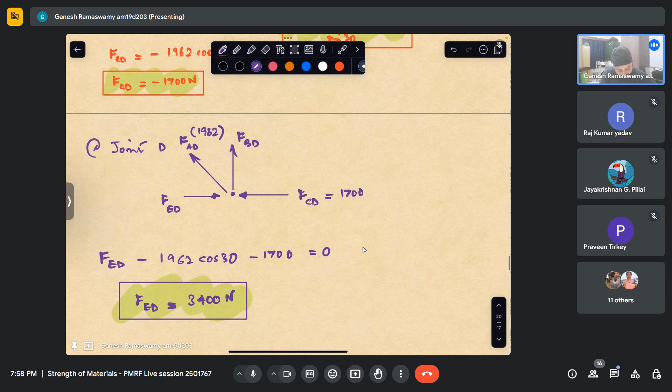Now let us look at it from the question. What is L? Is L given? We know that these were the members that were carrying the maximum tension, and from the very arrangement, we can see both are of the same length. If they were of different length, then we need to calculate the force, the change in dimensions in each, and then report the maximum one. Presently, they are both of the same length. So the length is 4, and from here we can easily see that it is 4 by sine 30, so it is 8 essentially. So 4 by cos 30, which is 4.62 meters.

I hope so. The length: cos 30 is length of DC by length of BC. So length of BC comes out to be 4.62 meters. So we have the length also in the member, and this is in meters, mind you.

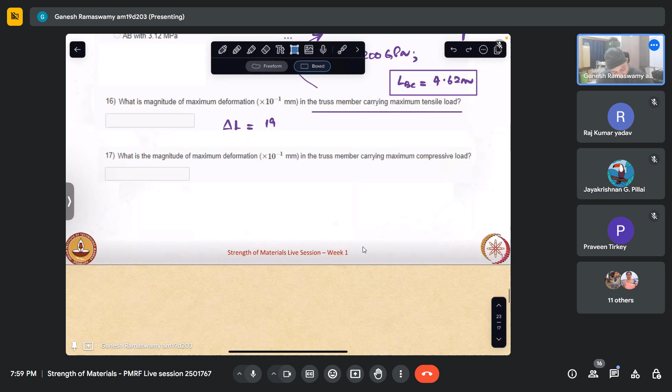Let me go there. So the length of the member is this much. Now it is just a matter of calculating what is the maximum deformation. Maximum deformation is PL by AE. Delta L is nothing but PL by AE.

P is 1962 into 4.62 meters, converted to mm, divided by area, which is 20 squared pi by 4, into E. E is given as 200 GPa. Presently we are doing everything in Newton per mm square, which is MPa, so 200 into 10 power 3. These conversions one should keep in mind and be comfortable with, so that one is able to do it quickly. Into 1962 into 4.62 E3, this comes out to be 0.144 mm.

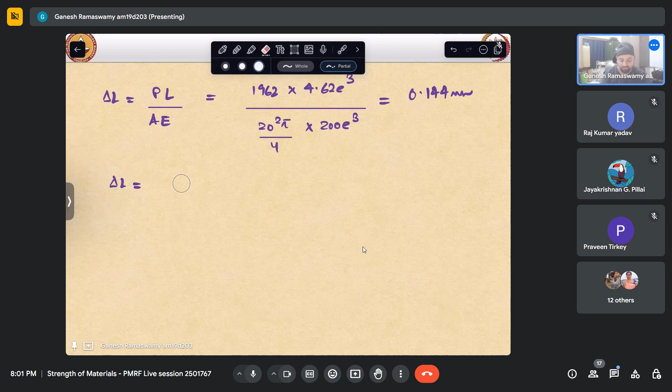I encourage the viewers to solve this once and see for yourselves whether it is correct. Now the answer is asked to report in 10 power minus 1. So what should we do to our answer? We should divide it by that value. Delta L is actually 0.144 mm. Let me just check it once: into 1962 into 4.62 E3. Yeah, 0.144 exactly. So 0.144 mm is my answer.

However, I have been asked to report it in a specific format. I encourage all those who are taking the assignments to please finally read the question again as to how it is asked, in which format, so that you don't lose out. So it is asked in 10 power minus 1, so essentially I have to divide my answer by 10 power minus 1 and then report it.

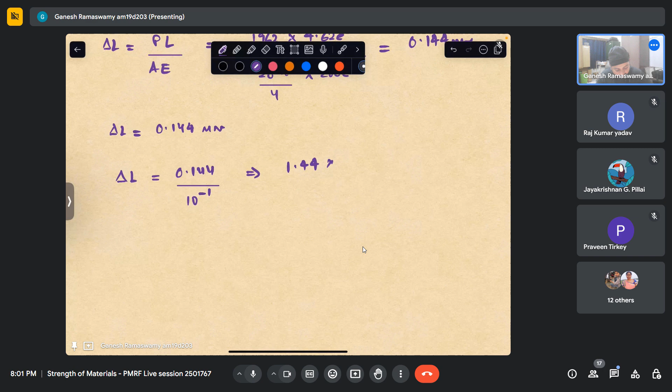0.144 by 10 power minus 1, which is nothing but 1.44 into 10 power minus 1 mm. So I should report my answer as 1.44. Since magnitude is asked, I have to report the absolute value. It did not matter in question 16 because it was tensile stress. In question 17, it will be compressive stress, but still I have to report the magnitude. I will leave question 17 as an exercise for the viewers to do it.

Anyway, we have run out of time. I hope I have done some justice in explaining and giving an overall introduction to the course for the first week. I hope it was helpful for you. If there are any questions, you are welcome to ask them.

But I'll just give you a flavor of what it entails. For interested people who are staying back, I'll just take 2 minutes and explain, so that people who are interested can make an attempt.

Basically, it has a sleeve. We have a sleeve and then we have a bolt like this. There is a misfit - the length is a little bit more. And we have another end to this where there is a thread, and we are trying to tighten this into place in order to make both the lengths same. So what is the stress and strain developed in both these members is what is asked.

In the lecture, there is also a bolt and nut problem that is discussed. This question is very similar to that. What it is saying is, presently it is like this - that is, this is distinct, my lengths are like this. So in my final configuration, this would have come here, this would also have come here, and my cap would have gone there. So now you can figure out if this is the sleeve.

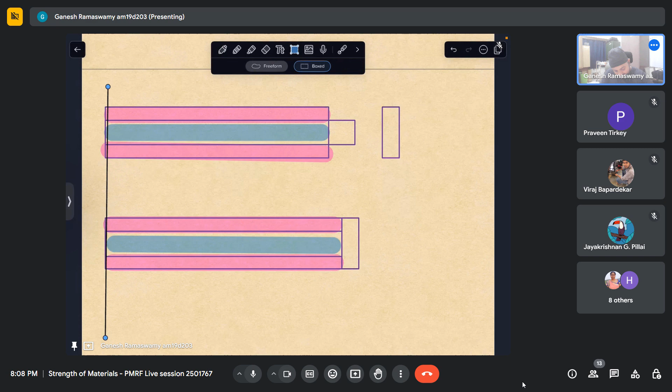And let us say this is the bolt. Now from these two figures, the left side matches, okay? The left side matches. What happens to the right side? This is the final position. This is my final position. This is my initial position.

And let this be the cap. Let this be the thing that we are trying to tighten. So I will just put it here. I'm just keeping it here. I have not tightened it, mind you. I'll just put it at a little bit of distance so that it is clear.

So with this background, what can we say about what happens to the sleeve? What can we say about what happens to the bolt? And how much has this thing moved? So this is something you need to find out in order to solve this issue, solve the problem. So I encourage you to ponder over this. Anyway, this PDF will be available.

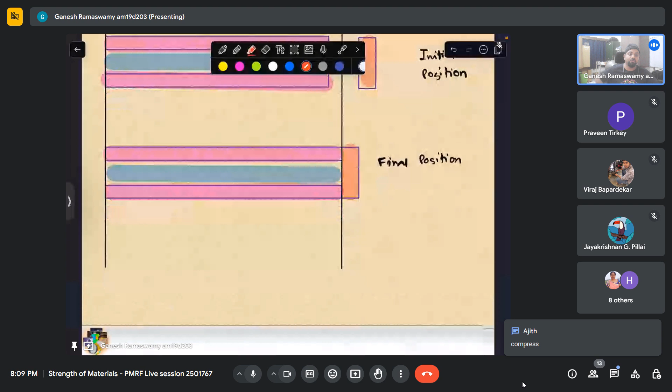Anyway, I suppose you will get the rest. So similarly, there will be two unknowns, so there are two equations. What are those two equations? One comes from our compatibility of displacements. One comes from our equilibrium, sigma fx equal to 0. With that, you should be able to solve.

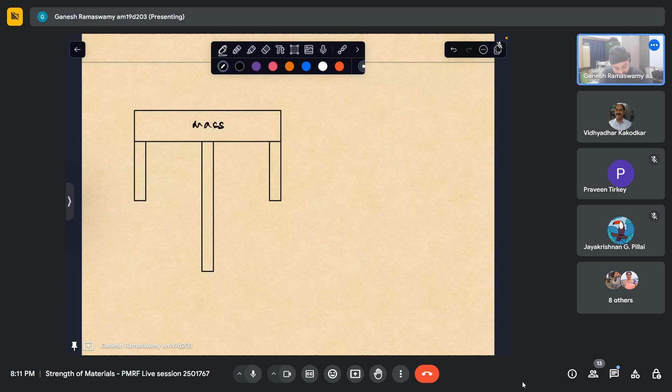So I have a mass, and then I have two steel, or whichever material that is, and then I have a longer rod, something to that effect. Now my idea is this has a mass or a weight or whatever that is. We know what is the allowable sigma, we know what is sigma allowable in both of them.

So there will be one equation that comes from our force equilibrium. Let us say I separate all these out. I will have forces like this. This will be the force in the middle one, this will be the force in the extreme ones. Correct? So it's the same thing from Newton's third law, we know it will get applied like this.

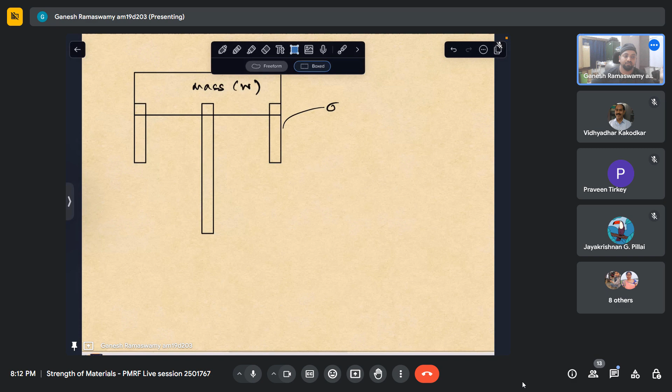So we have one equilibrium equation, the other one comes from displacement compatibility. Now for displacement compatibility, if this mass, let me go back to the original thing, if this mass goes down by one amount, let us say that this mass has gone till this point. Can we see that the compression, the change in length in both the rods, are they equal or unequal? This bar, this weight, is rigid.

So under the weight, let us say that this weight has moved here because of the deformation in the rods. Now you can just assess whether the deformation in the middle rod is more or the end rods are more. Change in length is equal. So with that, you can approach the problem and try to address it.